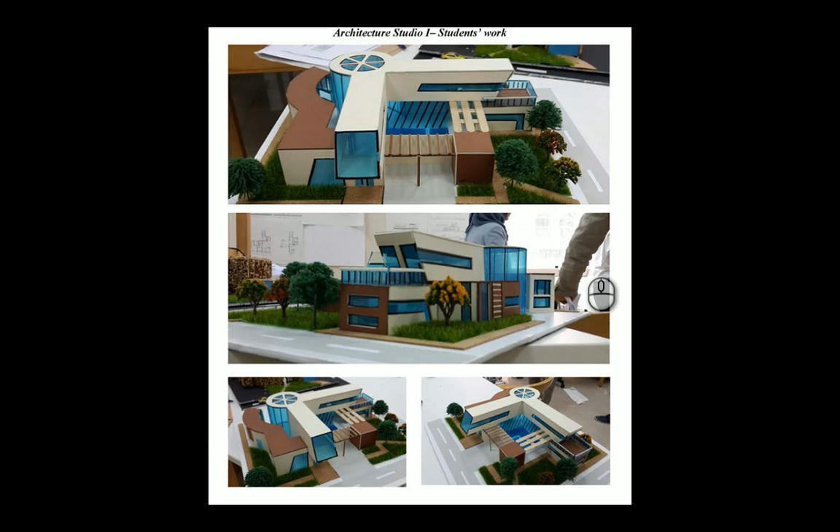So this project I will make as separated videos, and each video will try to demonstrate a part of the work. If you have a simple model like this, or a basic model like this, and want to try - especially I'm targeting here the first or second year students - it's a very basic export process for a basic design process, and here I'll try to model each part from the model itself into 3D Studio Max.

In this case, it's a good idea to have a ruler and try to get X and Y for every single unit of every element. I know there are lots of different ways you can take a picture of it and get into AutoCAD to draw it, but this can also be a good way of doing it, actually a faster way if you don't have a scanner or don't want to get into scaling pictures into AutoCAD.

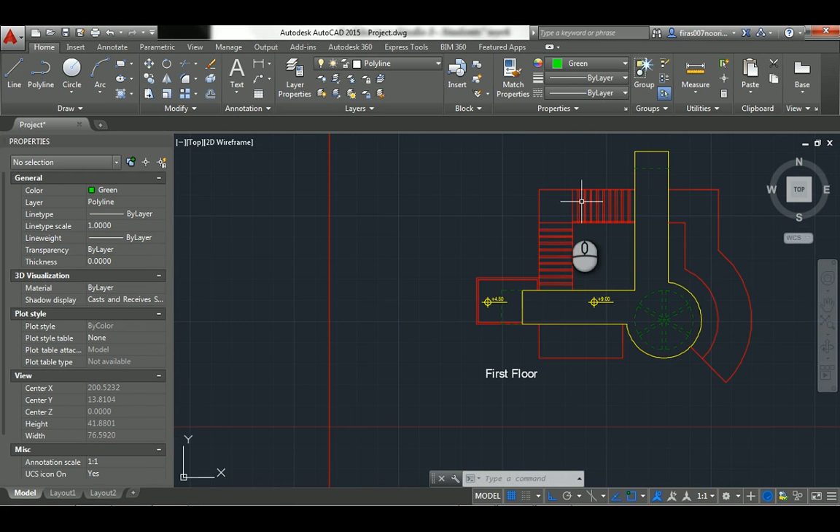So you can just get a ruler and measure the dimension for each unit, and then roughly draw documents like this one, for example, that represent the entire site, where the yellow is the second floor, the white is the first floor, and the red is the ground. Anyway, that's the ground with more detail. I drew a simple 4 elevation where the height is 4.5, as shown here between each.

It's a good idea to start by having a polyline, so I draw a polyline here and a polyline here - it's just an offset of it. And in case you don't know how to draw a polyline, it's just PL, and I will go through each part of it.

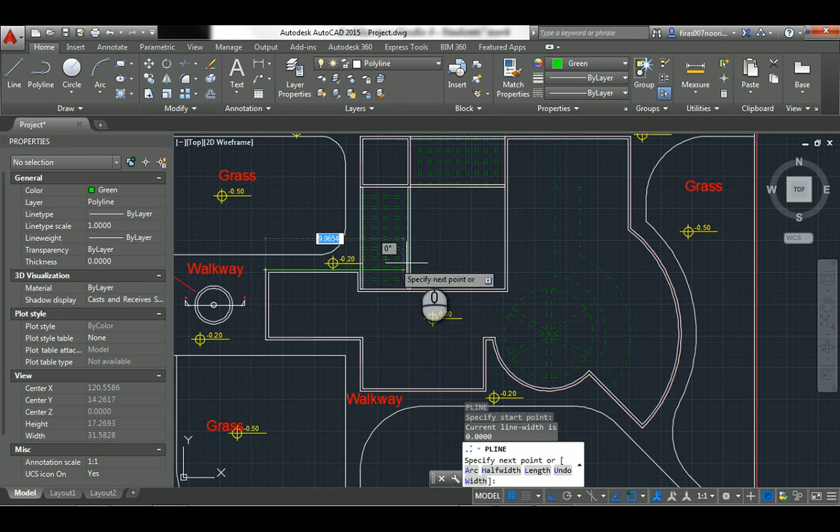I'm not going to redraw it again, I just want to show you here. So if I go PL, it's going to draw a straight line, and when you reach a curve, you have to press A, space, and then just pick a point. Don't worry about the shape of the curve - to return to a line, press L, space, and then click again, and so on. After you finish, you have to reach the end and make the loop, and at the end of the loop just hit C, space, in order to close the loop.

I already explained that in the previous videos. Anyway, have a look at this - you can just click here and drag it to the edge, likewise here, to make it the exact location, and then you can use the offset command.

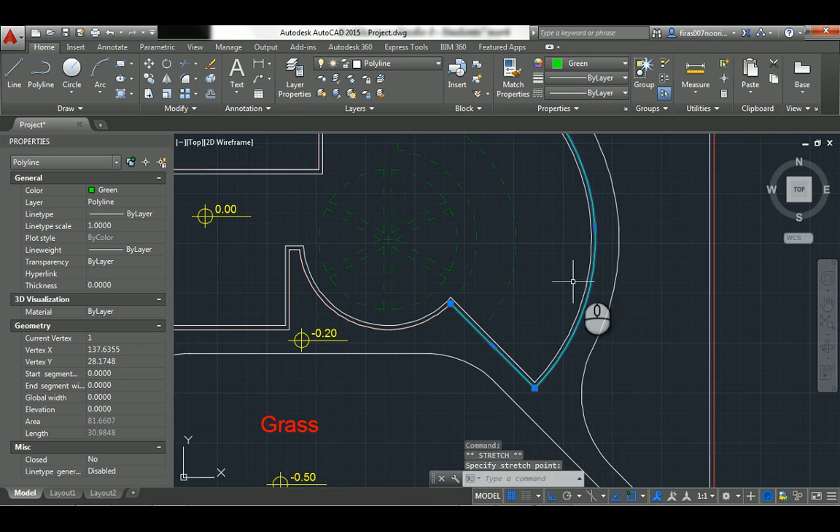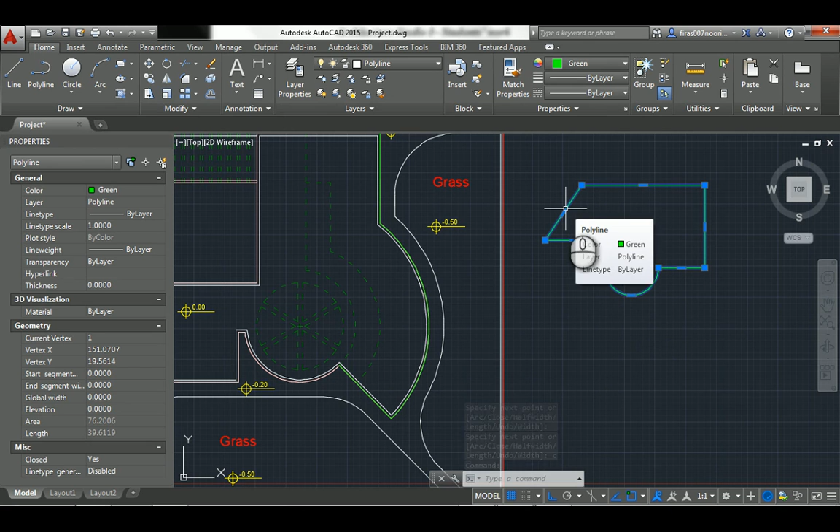So the trick is when you use polyline, PL again, it's just going to draw lines like that and that. If you want to change it into an arc, just hit A and then space - it's going to start drawing arcs, as you can see. Then L, space, to return to drawing straight lines, and when you want to close it, just hit C, space, and it will make a closed loop. It's very important to send a closed loop from AutoCAD to 3D Studio Max to make it exactly a capped extrude rather than a non-capped extrude, which is almost useless for our purpose here.

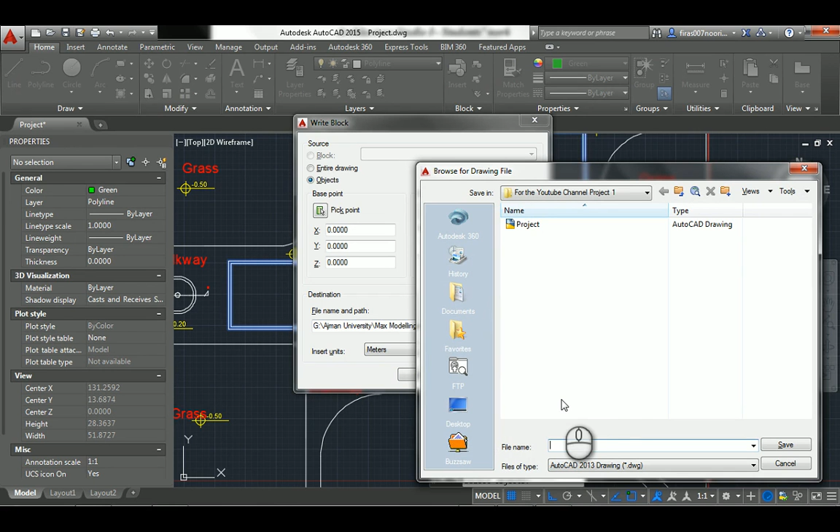I'm going to delete my line - I already did this, so I can just hit W for write block and then select objects, and I'm going to select those 2 lines here. I'll hit space, and change the location of the file here. I'll just name it new block with the default name, or just name it 1, whatever you want, and then hit save and hit OK.

Now, as long as we exported something, it took those 2 lines and made them an entire separated file by itself. I did explain that also in the previous basic export example that I did in a previous YouTube video.

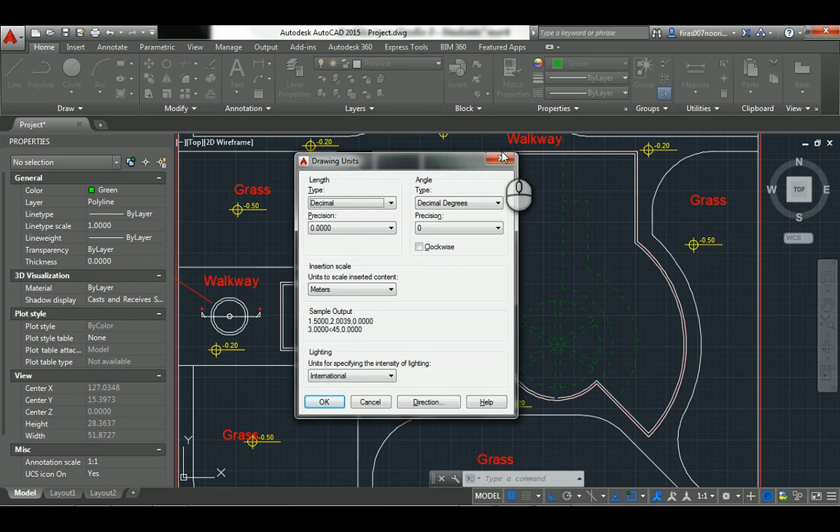Here again, it's a good idea to go to units inside AutoCAD - type UNITS, hit space or enter, and have a look at what you have here. So here the units are meters, so it's a good idea to follow this, and you go to 3D Studio Max, and in the customize unit setup, make this metric meter, and from the system unit setup, make sure that this is meter too. So those two things should follow whatever you have in AutoCAD.

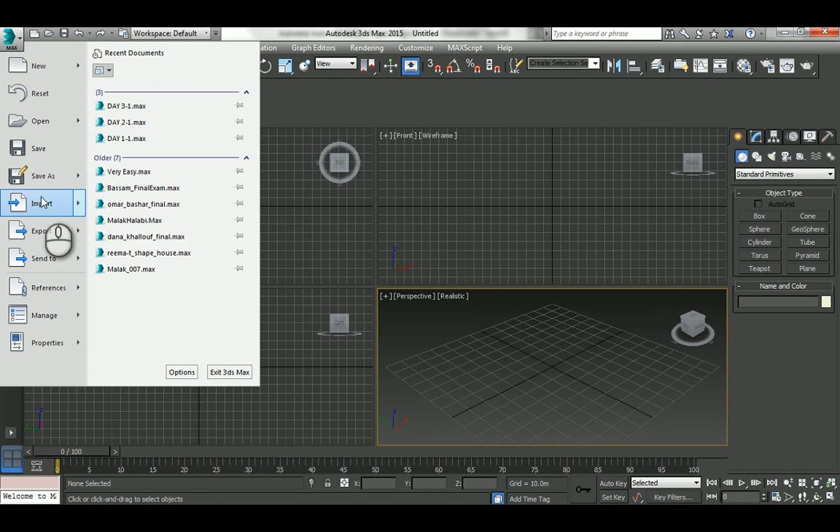Now in 3D Studio Max, I will go here and go to import, and from import I will choose the same folder that I created for this tutorial.

Which for some reason I cannot find it.

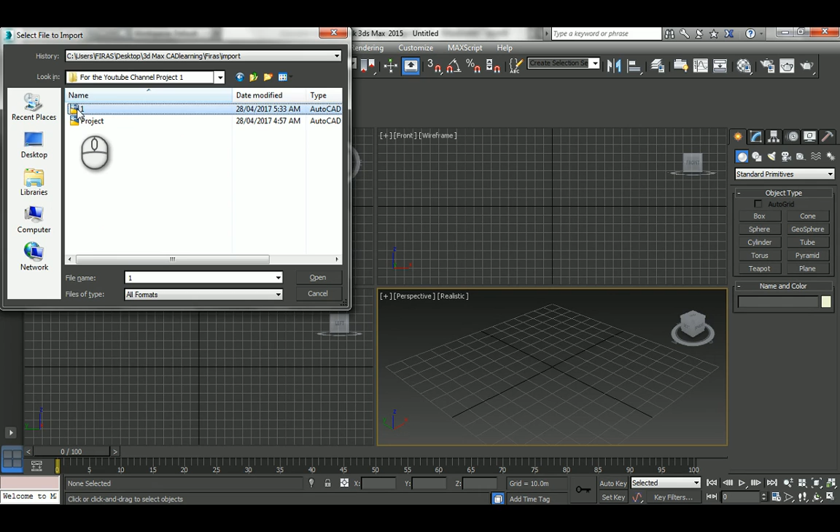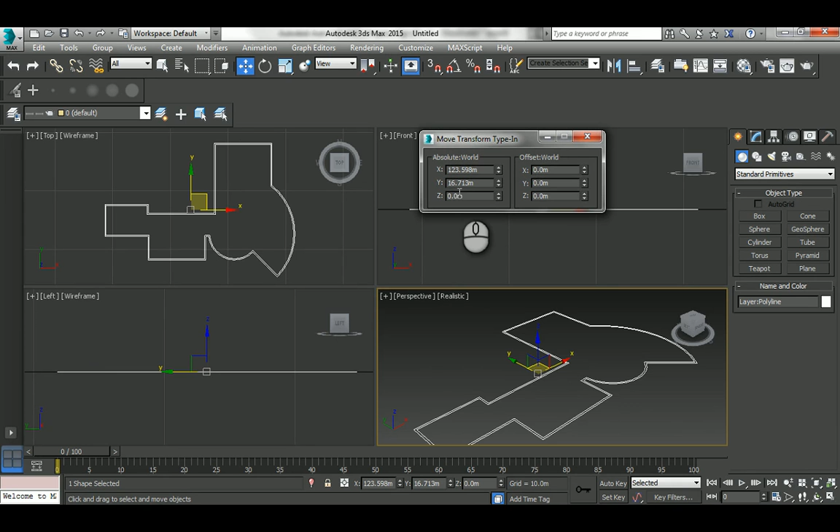I just named it one, as if you remembered. It's gonna load it again, and it's gonna take some time depending on how fast your laptop is and how big the file is. Just accept the default, and as you can see, it's gonna load that into 3D Studio Max and place it at a level of 0,0. If you hit move and select the object, right click on move, you'll see that it's located at level 0. I'll return to AutoCAD and see what type of levels we have.

I notice that the floor finish of the inside is 0 and the outside walkway is minus 0.2. So you've got to follow the lowest point, and in that case it's a good idea to make it minus 0.2 to lower that down, and then add extrude to it.

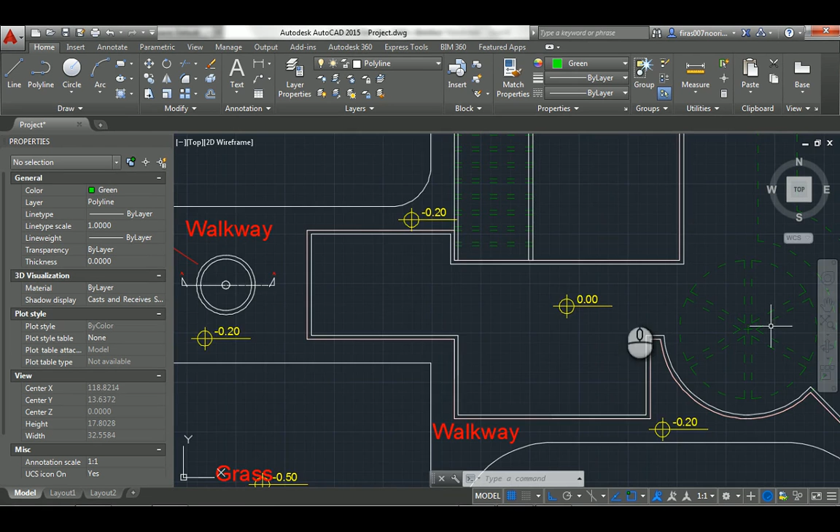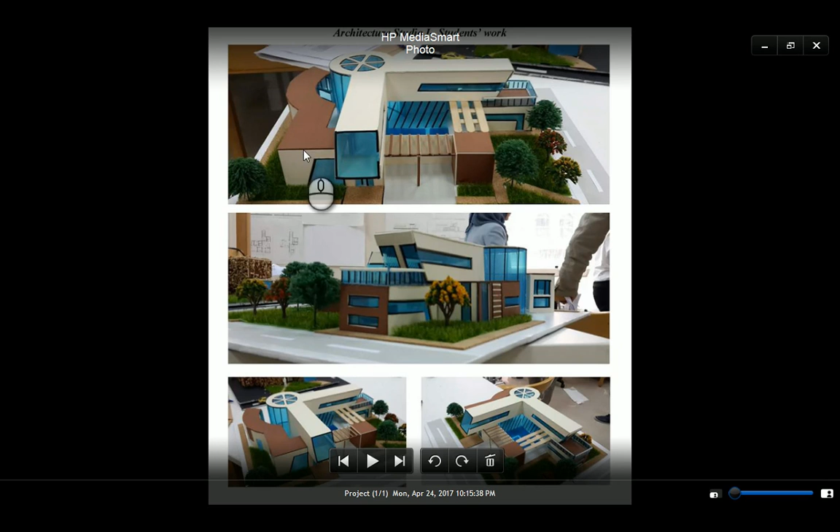In the extrude, you need to understand how much the height is. So it ended here at 4.5, and that means 4.5 is the floor finish of that level. If you look at the pictures again, you notice that here the student made it on purpose so that slab is actually shown - it doesn't want the wall to be shown, and the slab is not concealed under or behind the wall itself. So in this case, that point, which is the surface of the floor finish here, will be the 4.5, so you need to be like 200 millimeters less than that.

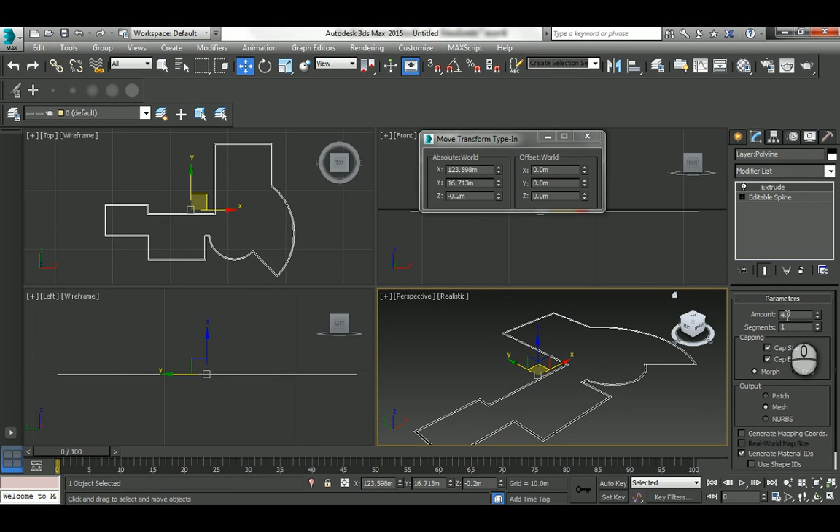So in this case, if you go to 3D Max, you need to go from minus 0.2 to 4.5. Let's say from 0 to 4.5, that's 4.5, and then extra 0.2, that will be 4.7. But remember you have to remove 200 mil again to get rid of the slab thickness. So it should be 4.5.

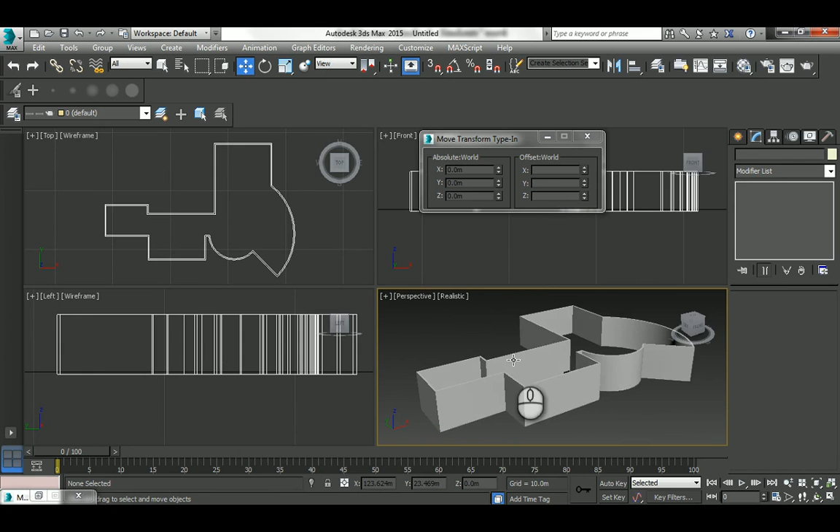Now it's kind of really black, so hit M for material and drop any default material here. So that's your walls again - that represents the entire ground floor walls. I'll go again to the same file, and this time I'll WBLOCK, choosing only the inner line which represents the slab edge, the lower slab, which is the ground floor finish, set at a level of 0.

So again, I'll go into Max and import, and this time I think it took the default name, which is new block. Here, if you zoom in, you'll see that it's actually placed at a level of 0, which is just a happy coincidence - it's the same floor finish, so I'm not going to change that.

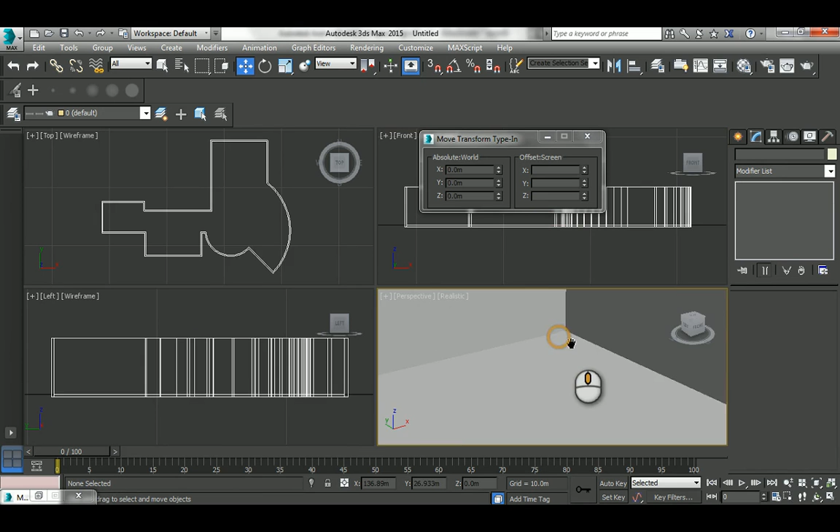All I'm going to do is add extrude to it, and I'll assume all horizontal levels are minus 0.2, and then I'm gonna give it a material. Maybe if you need to hit F4 just to see the edge, will be a good idea.

For all horizontal surfaces, I usually go with the minus extrude, and for us as an architect it's a good idea, because when you want to select the slab later and look at its level, rather than adding or getting rid of 200 from the final value. So usually for any horizontal surface, it's good to use the same Z value as the floor finish in AutoCAD, and give it an extrude of minus 200. Now again, back to the pictures.

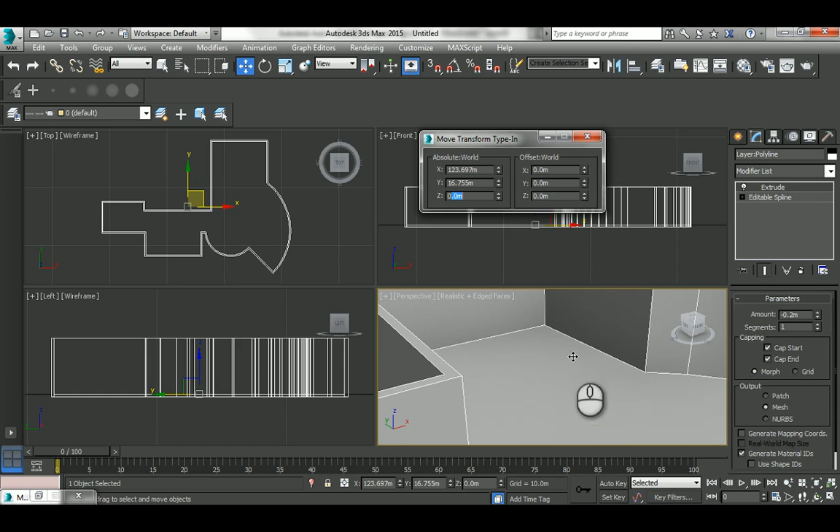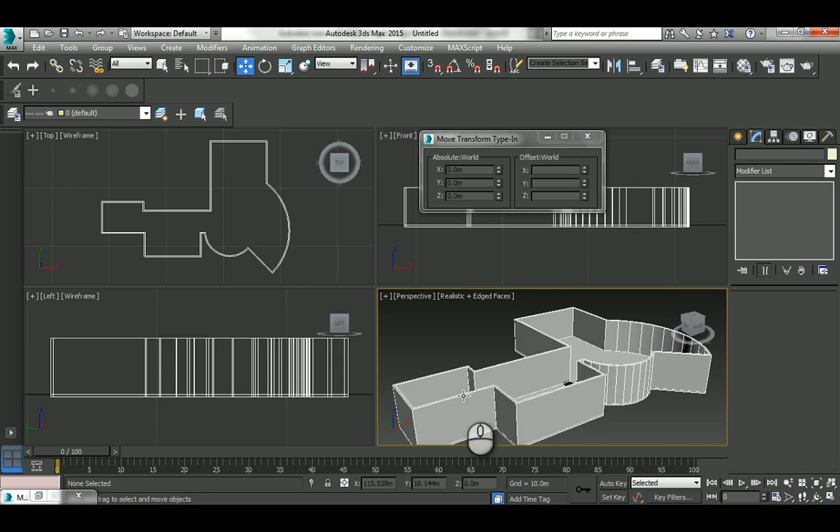See, the slab is actually covering the wall, so in this case, inside AutoCAD, I need to WBLOCK, and this time I'm gonna select the outer line. Import it again, and it will be here on level 0. I will raise that to 4.5 immediately, which is the floor finish.

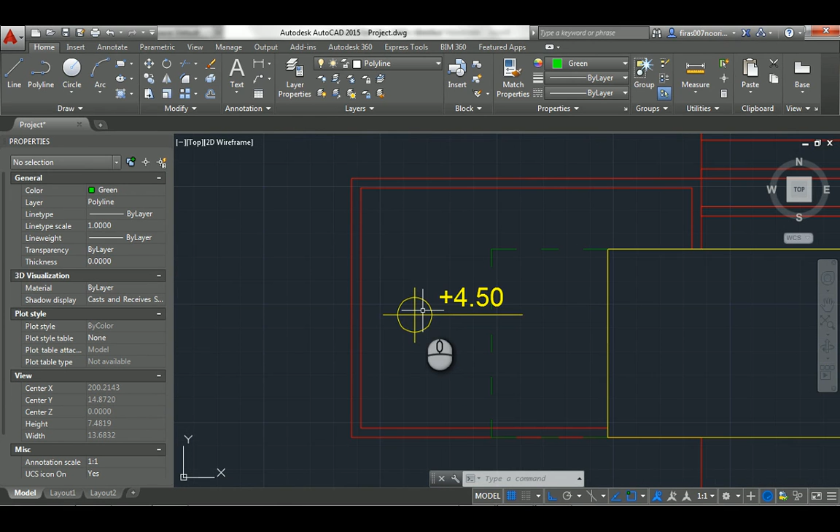See, it's gonna be a little bit floating. That 4.5, I got from AutoCAD. Don't forget, horizontal surfaces must always be at the same dimension, the same level available in AutoCAD. So it's 4.5, and the extrude is minus 200, as I said.

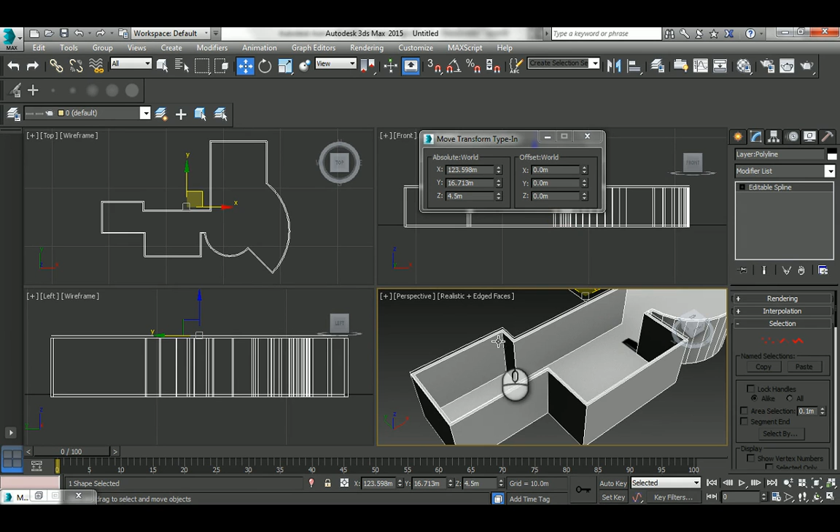Because it's good to be lazy from time to time, you don't need to add the extrude again each time and set it to minus 200. Just go to the lower level, right click, copy the extrude as a modifier, then paste it. Select the spline, right click, paste, and I'll paste it here with the same setting. For the material, I'll pick another one and change the diffuse color to a brownish one.

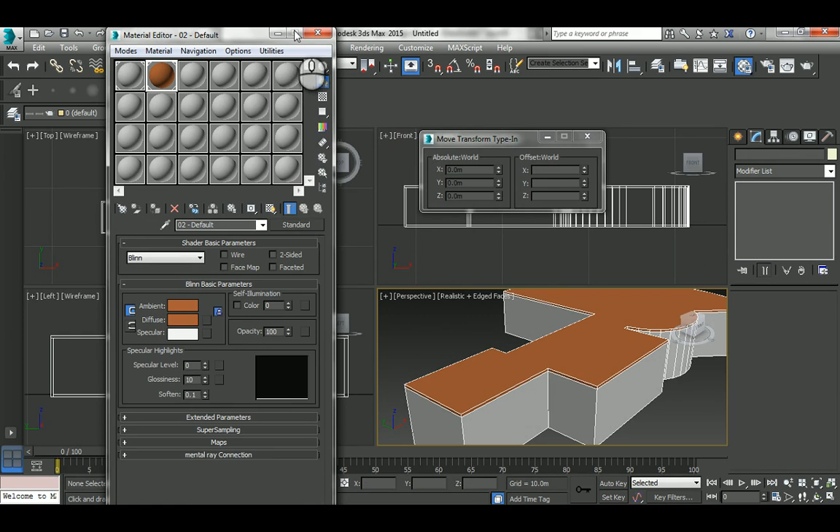And then I'm gonna drop it to get this. So that, as a starter, will technically finish the ground floor.

Now I need to do the first floor, and it's already been polylined here. Actually, it's not polylined, so have a look. The hidden lines, the dashes, represent the inclination that happened in the masses, which I'm gonna model later. For now I'll assume they are just straight, and in later phases of modeling I'll fix that.

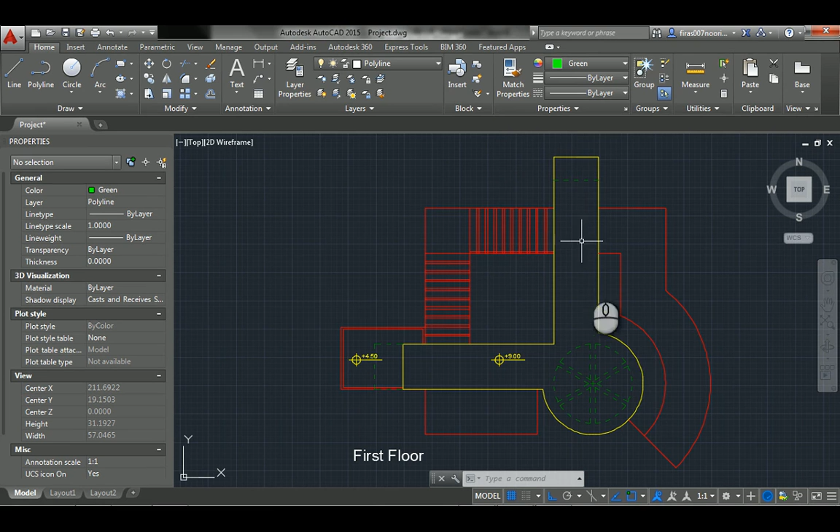Now you either go polyline here, which is boring, or just turn off this layer. Let's try this—if it's made in good layers, that's good. That's the benefit of working in appropriate layers. I'll turn off this. Beautiful. And I'll go BO for boundary.

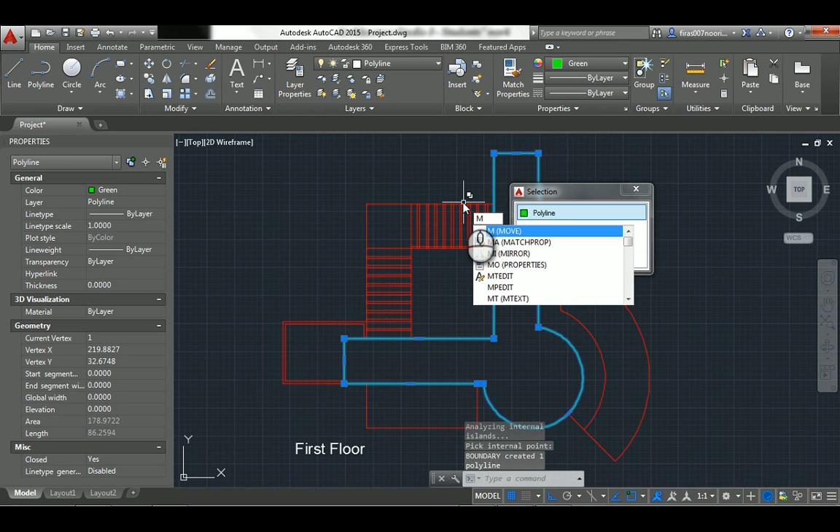And again, pick points once here, and that's my polyline. I'm gonna move it. But before you move it, you have to place that polyline, which represents the first floor, exactly in the same location as it should be on the ground floor.

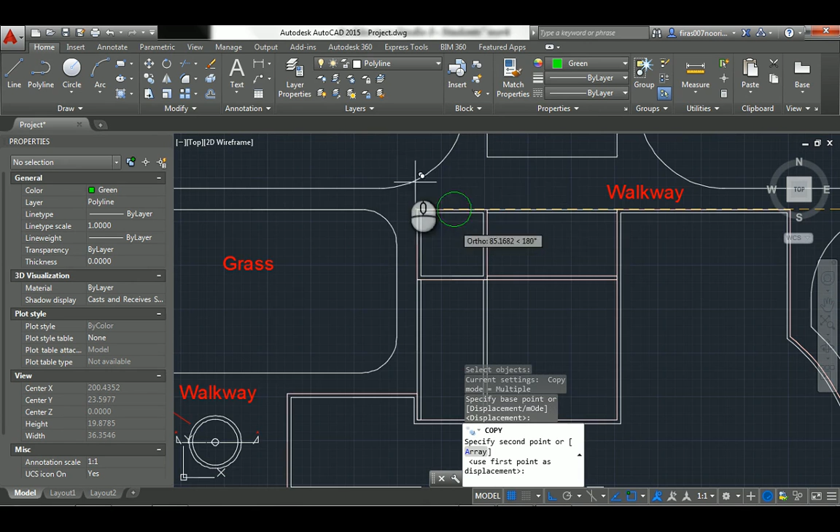So it's a good idea to make a reference point, so you can always copy and paste according to it as a base point. I'll assume that the corner here is the same thing, so that's my reference. So again, I'm gonna copy this from this point to this point, and give an offset of 250—if my memory is still alive.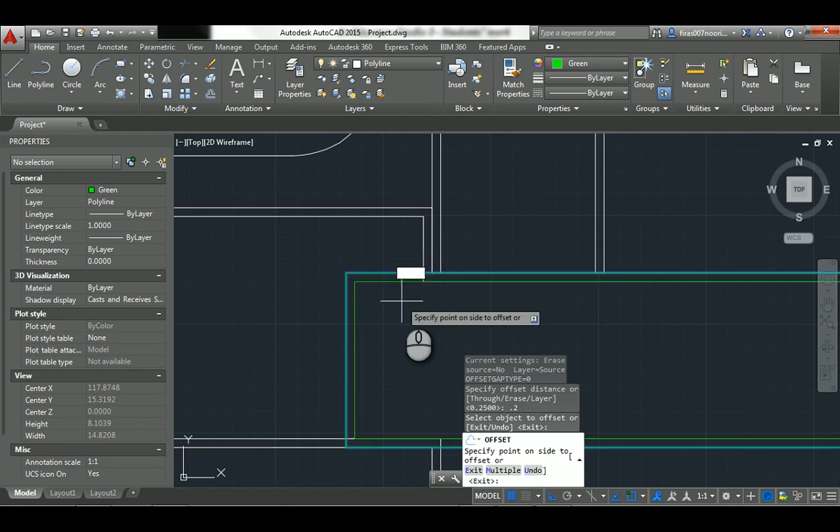Sorry, 0.25. No, so it's offset 0.2. Better. Now, write block, select, and override and replace the previous one.

In Max, the same process: file import, new block, and then OK. You're gonna notice that mostly it's unseen, so you either go arc rotate and see what's happening on the other side, or just hit F3 so you can turn everything into wireframe mode, select it, and push it up to 4.5, which is the level where the first floor actually starts.

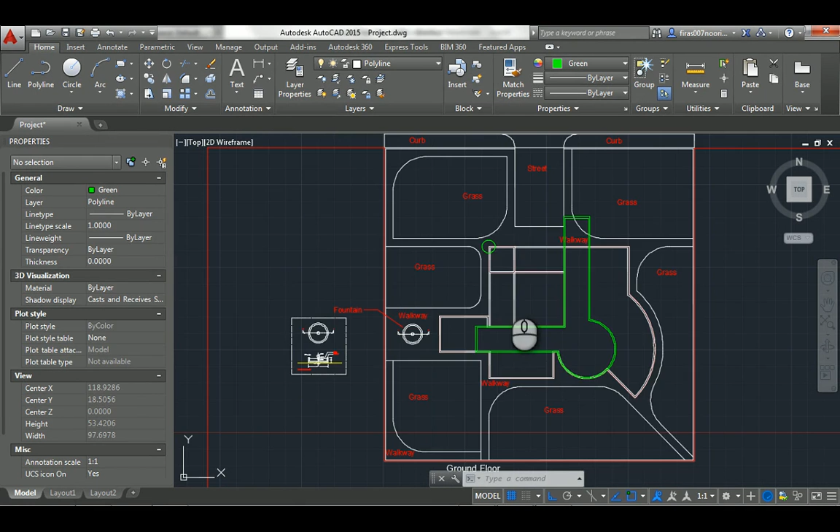If you open the layer panel, you can control-all and unhide everything, so you can see that it actually ends here at level 9, so it's again 4.5 as the overall extrusion. So place it on 4.5 and add a modifier of an extrude of 4.5 meters.

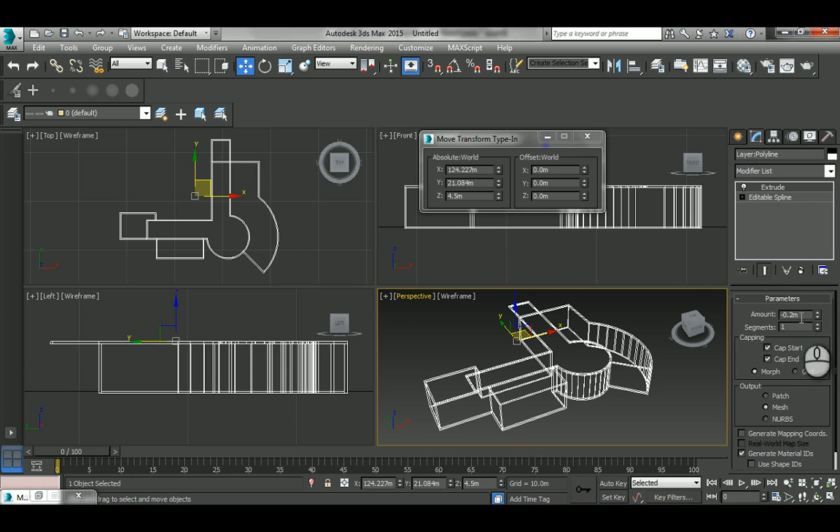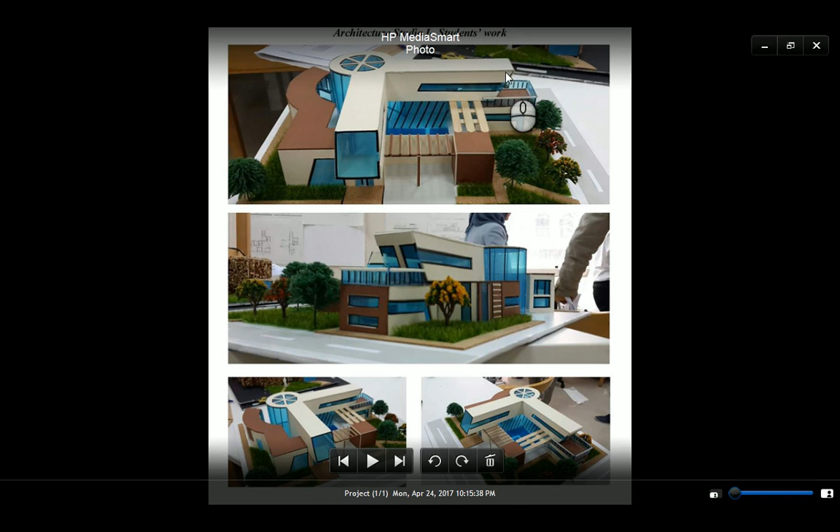Again, if you add exactly 4.5, I'll hit F3 to return that—it's gonna end up passing the slab or touching the floor finish. And if you look at the pictures, the slab is actually shown here, so the slab isn't concealed behind the wall—the wall's not actually touching the floor finish.

So it should be made 200 millimeters less, so it should actually be 4.3. Now what I need is to model the slab itself, which is this here.

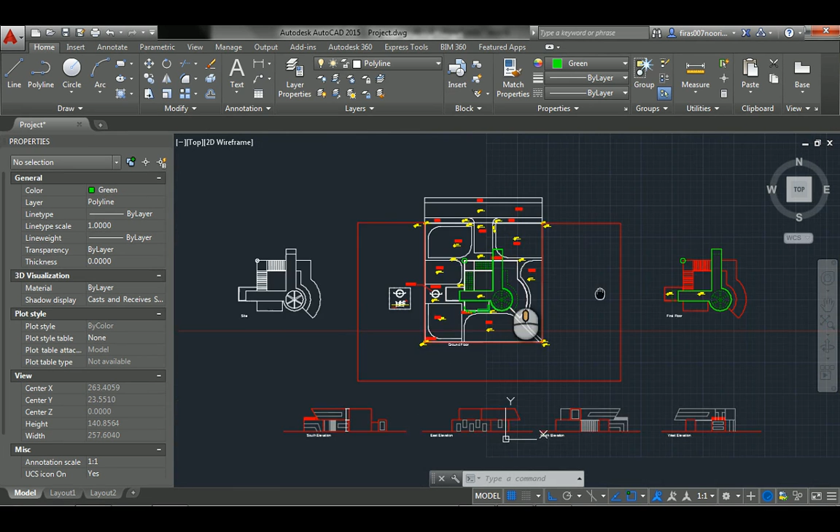So I'm gonna repeat the same thing. I'll write block, and this time select just the outer line here. And again, import it—you'll notice I didn't go for this, I just hit Alt F, just a quick shortcut if you like them.

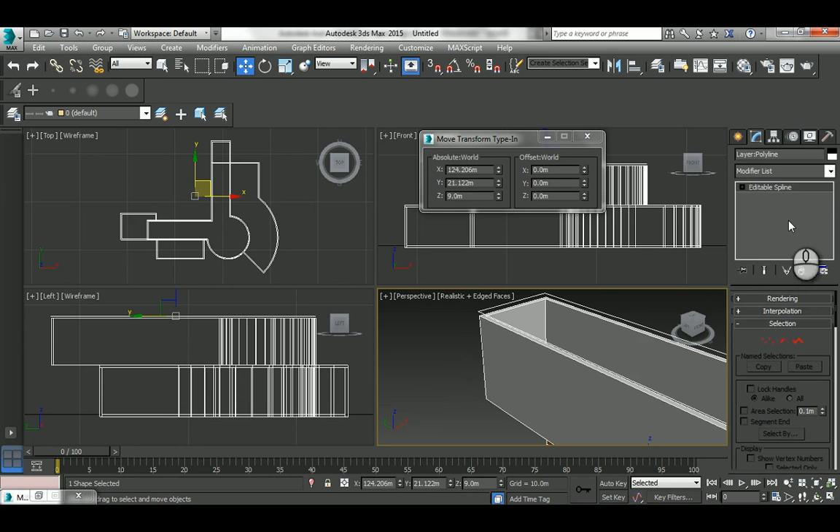And that's my thing here. I'm gonna put it at 9, and then I'm gonna add some extrude for it, and then assign that material for it.

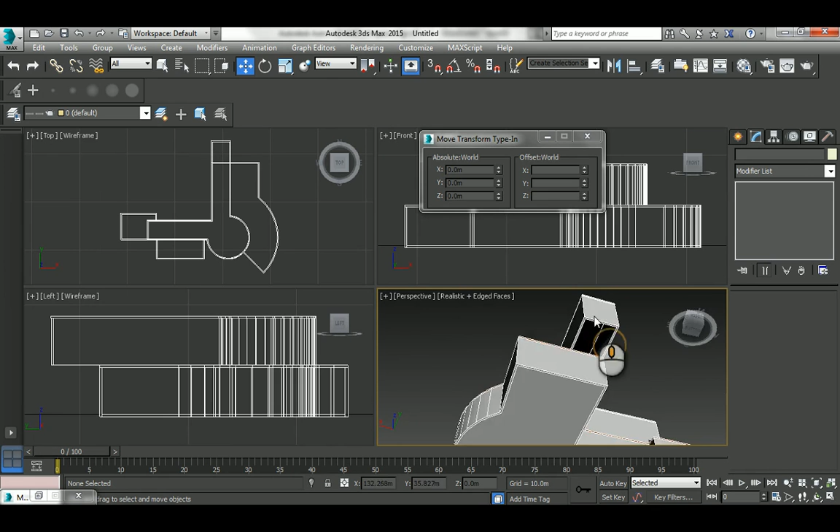So now I have the modeling of the building, this very simple and beautiful shape. And one thing missing—when you go down, you're gonna see that this is empty, and definitely you don't want that. If you just make it shaded, not realistic, you'll notice it's empty, so I'm missing something here, which is the slab.

Now it's easy to fix. All you gotta do is draw a rectangle, REC, here from that point to that point, and use the write block command to export it and do the same thing.

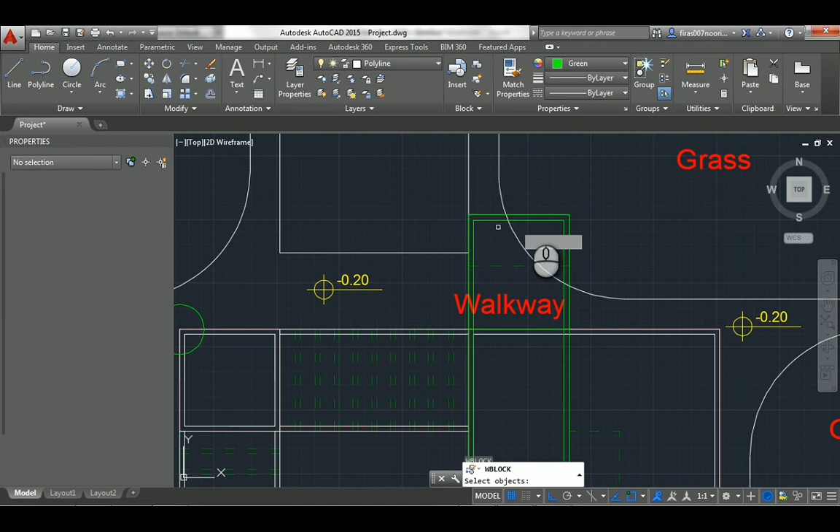And again, import it here, select it, and place it at 4.5, then add some extrude to it, and then the material—the brown one—and it's fixed, as you can see.

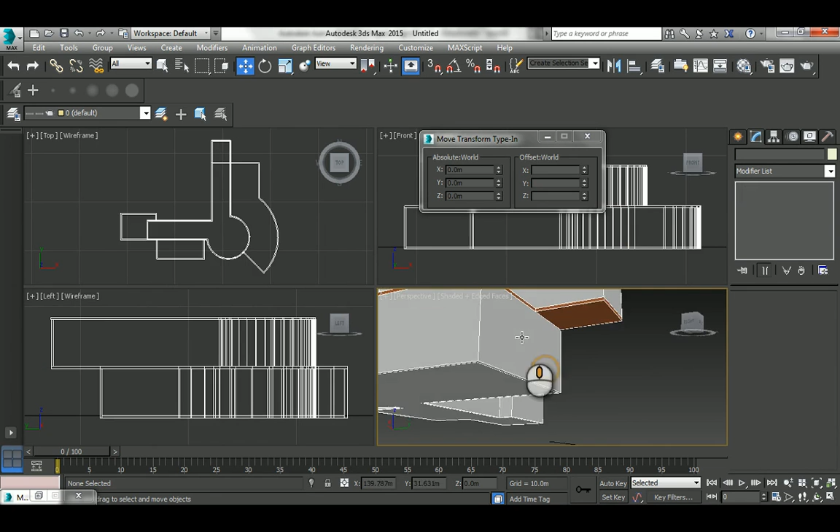So for now I will stop here, and in the next tutorial I'm gonna finish the modeling by adding the units here, the room here, and those couple of shading elements—horizontal elements. So see you then.